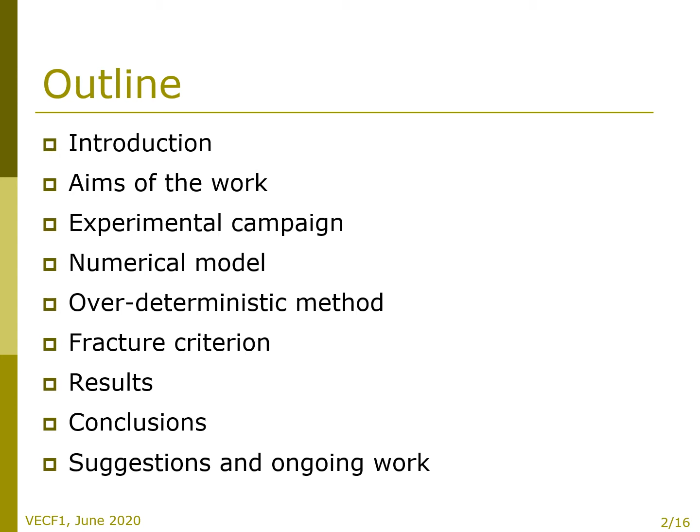Let's start with a short introduction. The thing is that it has been shown in the recent years that the classical linear elastic fracture mechanics concept that uses the stress intensity factor as the single controlling parameter for assessment of fracture behavior of specimens and structures with crack is not able to describe the fracture processes under specific conditions, especially when the fracture occurs in a more distant surroundings around the crack tip, which is typical, for instance, for quasi-brittle or elastic plastic materials.

Then, a multi-parameter approach seems to be a good choice. It assumes approximation of crack tip fields by means of the Williams expansion, considering more initial terms of the power series.

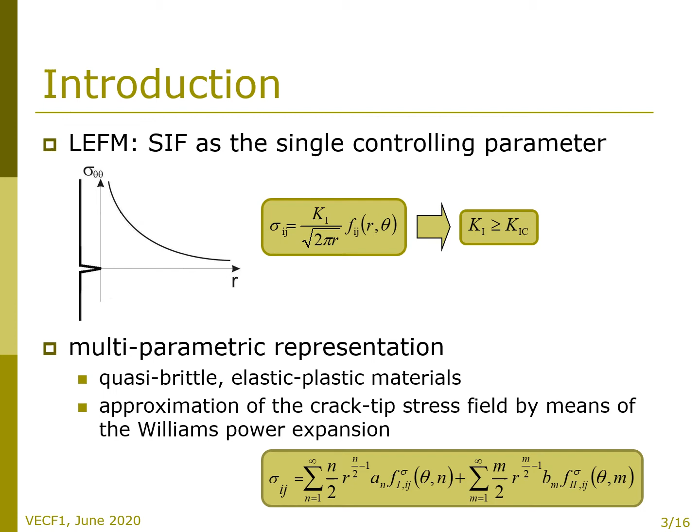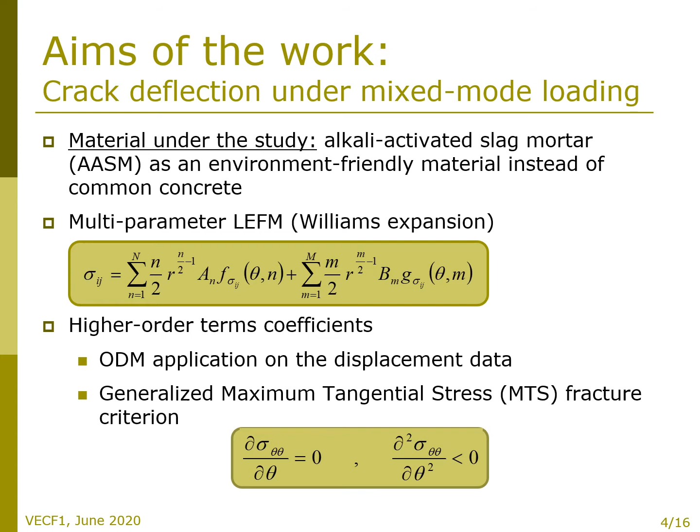The main aim of the work is to investigate crack deflection under mixed mode loading and to assess the importance of the higher order terms of the Williams expansion for description of this behavior. Crack deflection angles were observed based on the experimental campaign as well as calculated numerically from generalized maximum tangential stress criterion.

The following slide shows the information about the first part of the experimental campaign, measurement of basic fracture mechanical properties. It must be emphasized that the whole research has been performed on a novel material, particularly fine-grained composite based on the alkali-activated slag. Its main advantage in comparison to the common concrete is that it is environmental friendly, which is very important from the ecological point of view.

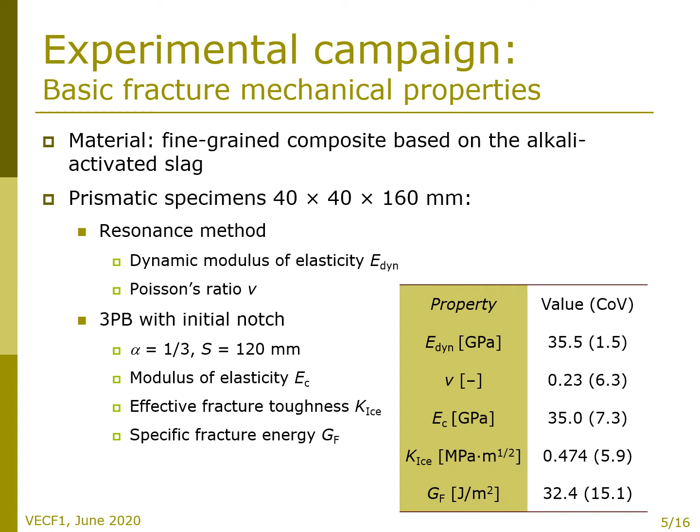To be able to use this material in praxis, its fracture mechanical behavior must be investigated and well known. You can see several details of the experimental setup, as well as values of Young's modulus, Poisson's ratio, fracture energy, effective fracture toughness, and specific fracture energy obtained on defined specimens. In this figure, you can see the concrete specimens and the laboratory testing.

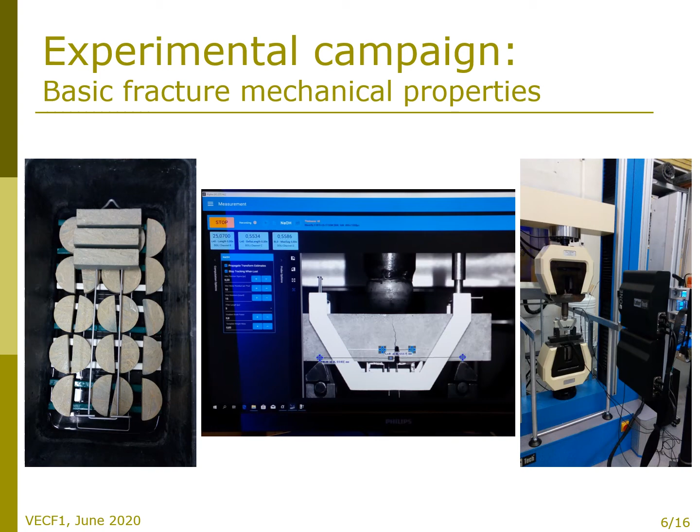We follow with further tests, and it is 3-point bending test on a semicircular disc with an inclined crack. In the table, you can see the dimensions and other parameters of the specimen during testing. The values are valid for the results presented within this video. Nevertheless, the campaign is more extensive.

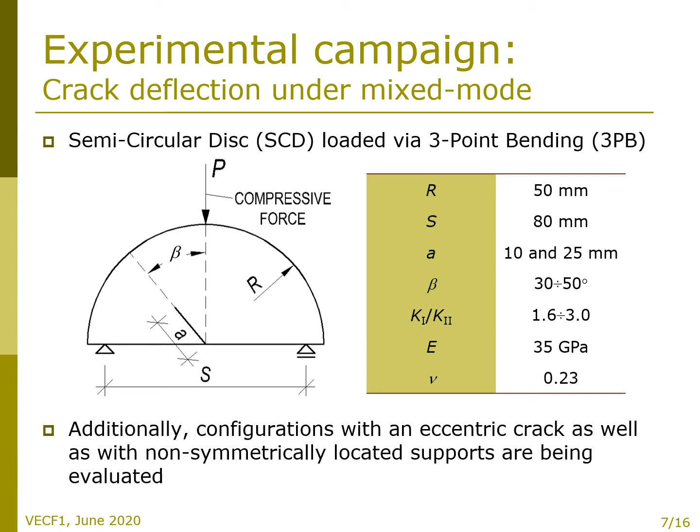Also, configurations with an eccentric crack and with not symmetrically located supports are being tested, and results evaluated in order to get a complex set of data for final conclusions. Here in this figure, the final failure of a semicircular disc is presented. Similarly, other tests are performed on specimens with an inclined crack and considering various values of other parameters.

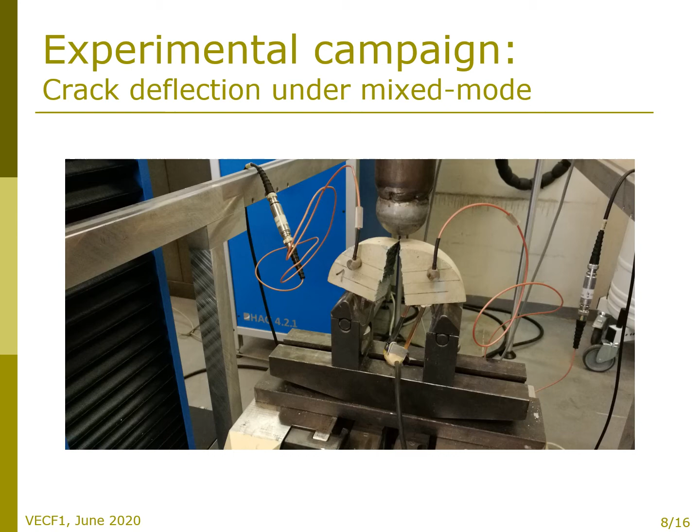A refined mesh considering the stress singularity at the crack tip was created by using KSCON command, and plane stress conditions were prescribed in order to be able to compare the numerical results with data observed experimentally on the specimen's surface.

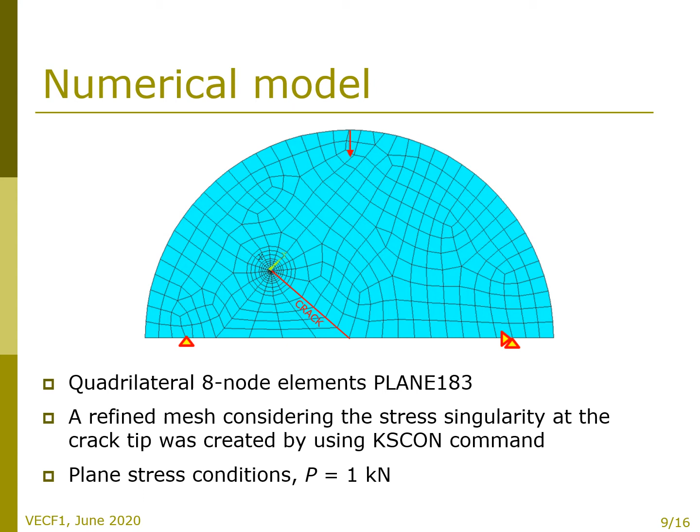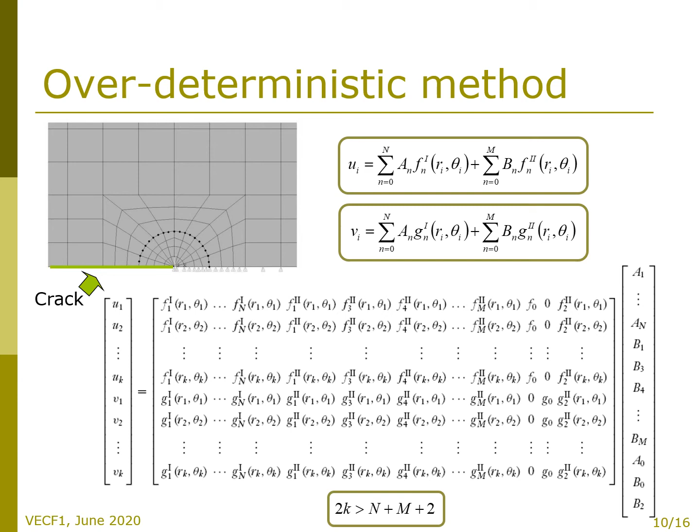When the coefficients of the higher order terms of the Williams expansion are known, an arbitrary stress tensor component around the crack tip can be approximated. And this is what is needed for application of the multi-parameter form of selected fracture criterion. In this work, the generalized MTS criterion was applied. It means that the direction where the tangential stress reached its maximum was searched.

Note that whereas the classical MTS criterion is independent on any other parameter, its multi-parameter form depends on the radial distance where it is used. This distance is often called the critical distance, and several recommendations on its estimation can be found in literature. For purposes of this research, the relation derived by Sih was applied.

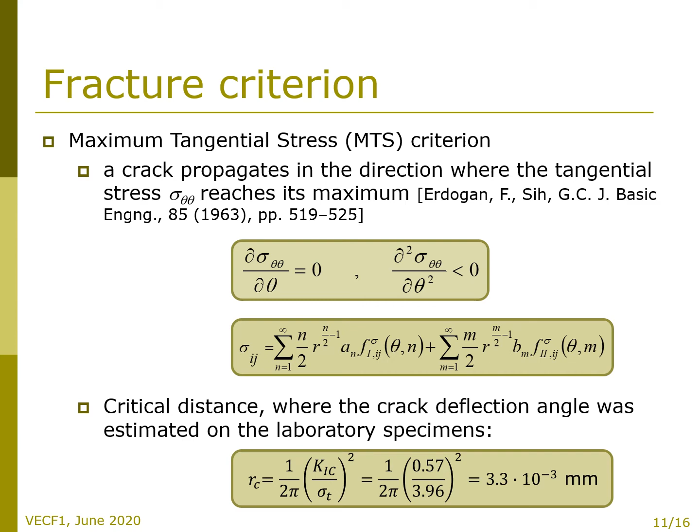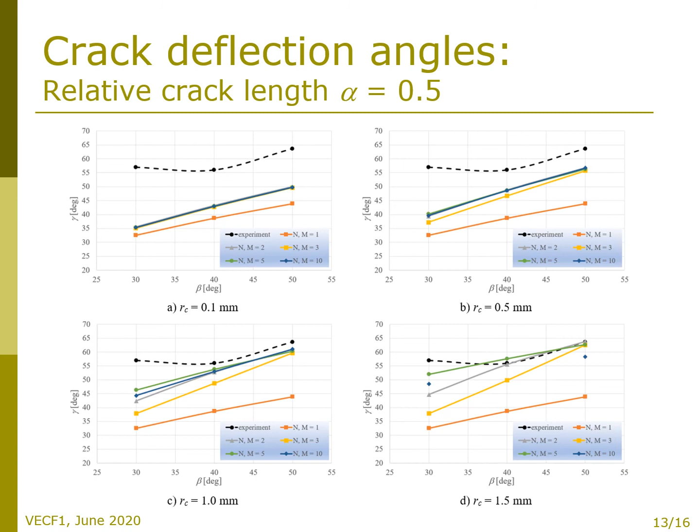Based on the results presented in the previous two slides, following conclusions can be stated. When the generalized MTS criterion is applied at small distance from the crack tip, RC, it means critical distance, is equal to 0.1 or 0.5 millimeters, the effect of the higher order terms is small or negligible. For longer cracks, using the classical MTS criterion, considering only the first singular term, or what was the orange curve in the plot, gives results very far from the experimental observation.

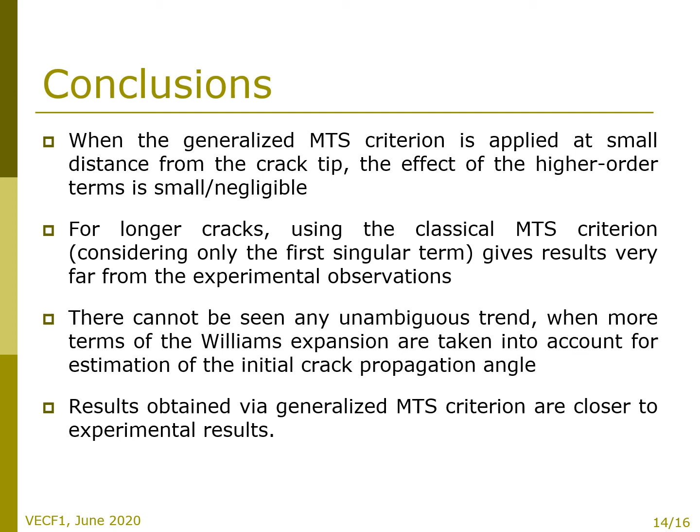There cannot be seen any unambiguous trend when more terms of the Williams expansion are considered for estimation of the initial crack propagation angle. But the results obtained via generalized MTS criterion are certainly closer to experimental results.

When more general conclusions and final suggestions shall be made, it can be stated that the generalized MTS criterion should be recommended for quasi-brittle material with rougher microstructure, such as concrete, as the critical distance where the fracture criterion is applied corresponds to the region where the fracture occurs and to basic material microstructure dimensions.

Also, the presence of the mixed mode conditions, configurations where the crack inclination angle is higher, beta is equal to 50 degrees, and so on, is a good reason for using the multi-parameter fracture mechanics approach to get better accuracy of results obtained.

Additionally, as a part of the ongoing and future research, configurations with an eccentric crack as well as with non-symmetrically located supports are being evaluated to get a more complex set of results and to be able to state as general conclusions as possible. Also, the strain energy density criterion is going to be applied on the crack deflection angle analysis for comparison.